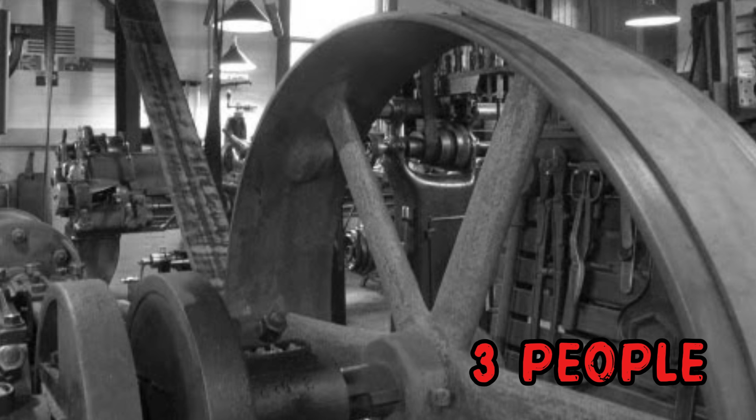breath. That wheel weighed somewhere between 64 and 68 tons, stood roughly 30 feet across, and through a network of shafts and belts it was, moments before it failed, the single source of motion for carding machines, looms, and hundreds of other machines running across 4 connected mill buildings.

It was not the first time this exact engine system had turned on the people who ran it. 3 years earlier, in 1888, it had already killed a man, an engineer named William Venable, and the mill had gone right on running it.

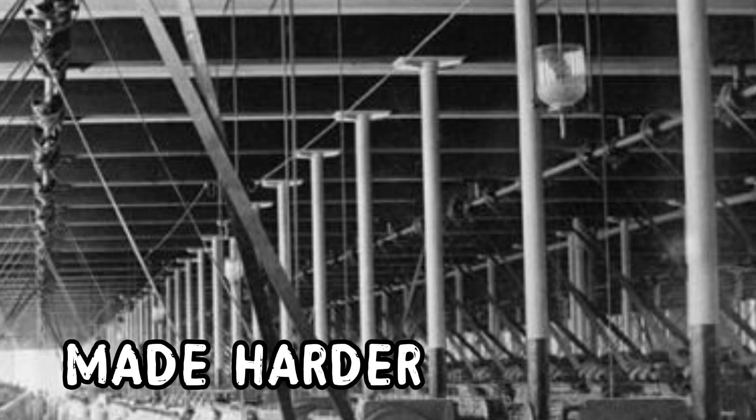The morning it finally came apart, the trouble was not showing up evenly across the complex, which made it harder for anyone on the floor to read in time. In the southern end of the mill, carding machines were losing speed for no reason the operators could point to, while at the very same time, in the northern end, the looms were speeding up, and at least one loom's own governor, the small mechanical safeguard built into the machine specifically to keep its speed under control, had already failed to hold it in check.

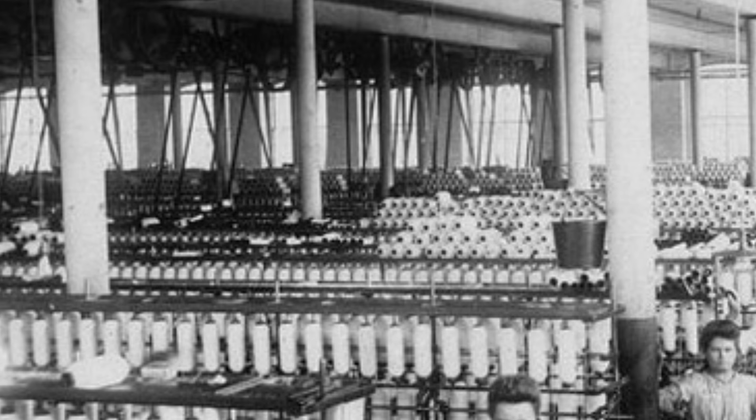To understand why an iron wheel spinning inside a New Hampshire textile mill could become one of the most concentrated stores of destructive energy in the entire building, you have to understand the problem it was built to solve in the first place, because the flywheel was never an accessory. It was the fix for a defect built into the steam engine itself, and the story of how that fix grew, decade after decade, into something powerful enough to level a mill floor is the story of an entire century of industrial power.

A piston steam engine does not produce power in a smooth, continuous push. Steam enters the cylinder, drives the piston down or across, and for that portion of the stroke, the engine is delivering real force to the crank. But between power strokes, and especially at the 2 points in the crank's rotation known as dead center, where the piston is at the very top or bottom of its travel and its thrust lines up directly with the crankshaft, the engine delivers essentially no rotational push at all.

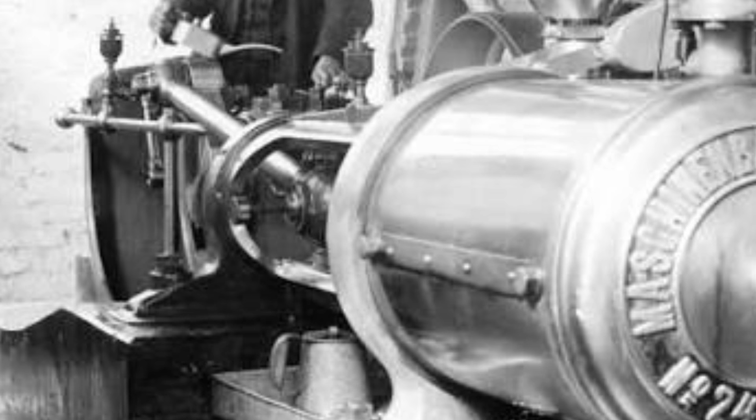Left to itself, a single-cylinder engine at dead center has nothing turning it forward. It can stall right there, mid-rotation, with a full head of steam behind a piston that is, for that instant, mechanically useless. Picture the crank arm of an engine like this, sweeping through a full circle.

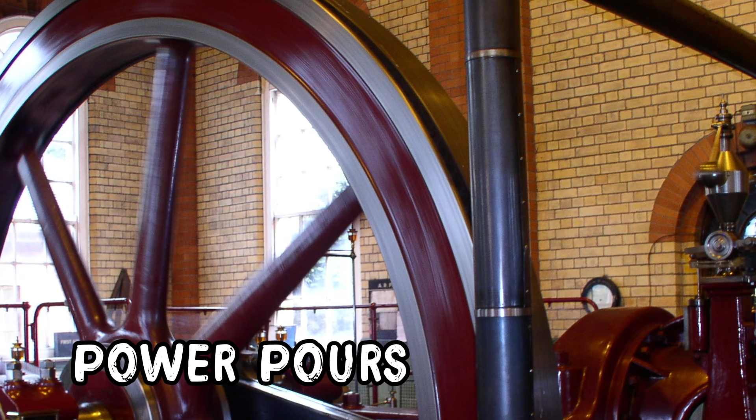For part of that circle, steam pressure behind the piston is shoving hard against the crank at an efficient angle, and power pours out. For another part of the same circle, the piston is still moving, but its push lines up almost uselessly with the shaft, contributing little. And at the 2 dead points, top and bottom, the push contributes nothing measurable at all. An engine running completely alone, with no reserve of motion carrying it through those dead points, delivers a rotation that surges, sags, and at the worst possible moment, under a sudden new load, can stop outright.

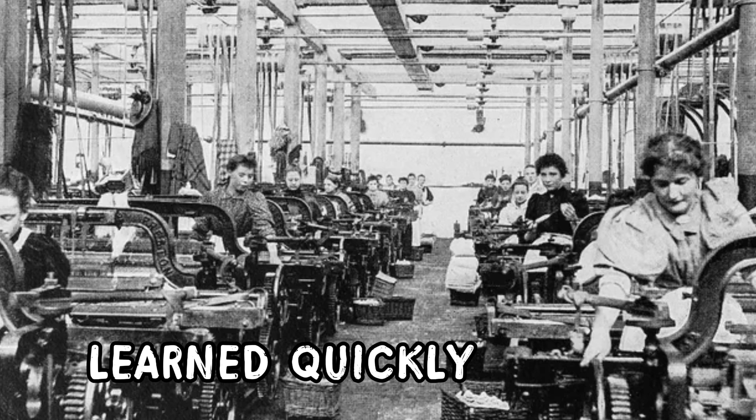Early millwrights and engineers who connected these engines directly to gearing, saws, looms, and line shafts learned quickly what that irregularity cost them. Power surged in and dropped away in a rhythm that matched the piston, not the needs of the machinery downstream. Gear teeth sheared off under the sudden peaks. Leather belts, already under constant tension, snapped at the jerks.

In a spinning mill, uneven rotational speed meant uneven twist in the yarn, thread that varied in strength and quality along its own length. In a press shop, it meant stamping force that came in hard on one blow and weak on the next. Saw blades chattered instead of cutting clean. And under any sudden load, an engine with no reserve of motion to draw on could stall, the entire line of machinery lurching to a stop with it.

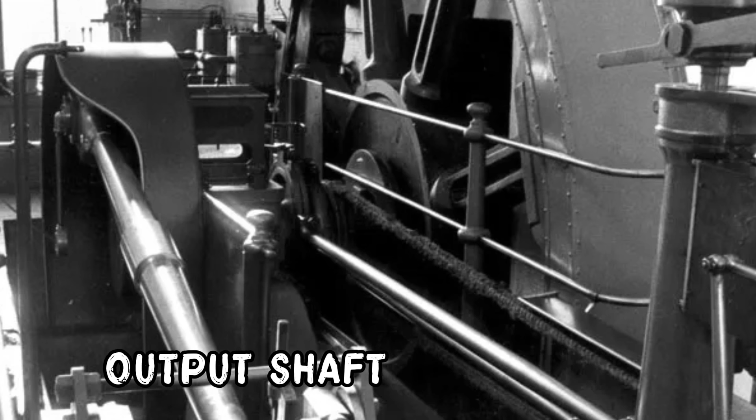The solution engineers arrived at was mechanically simple, even if its consequences were not. Mount a heavy wheel on the engine's output shaft, build most of its weight into a thick outer rim rather than a solid disc, and let that spinning mass do the job the piston alone could not.

During the power stroke, when the engine was delivering more force than the machinery needed at that instant, the surplus did not go to waste. It went into accelerating the wheel very slightly, stored as rotational motion in that heavy rim. Then, between strokes, as the piston's push fell away and even through dead center, the wheel's own momentum carried the crank forward, releasing that stored motion back into the system.

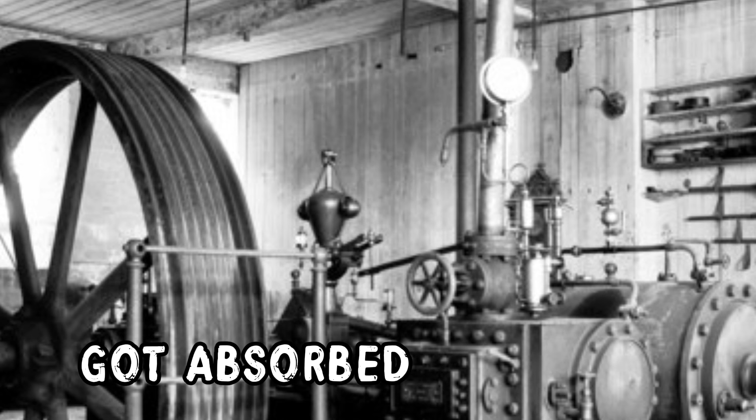The engine's own uneven breathing, in effect, got absorbed and smoothed out by a mass that was reluctant to change its speed quickly in either direction. What came out the other side, at the pulley, was not the jerky push of a piston, but something close to a steady, continuous rotation.

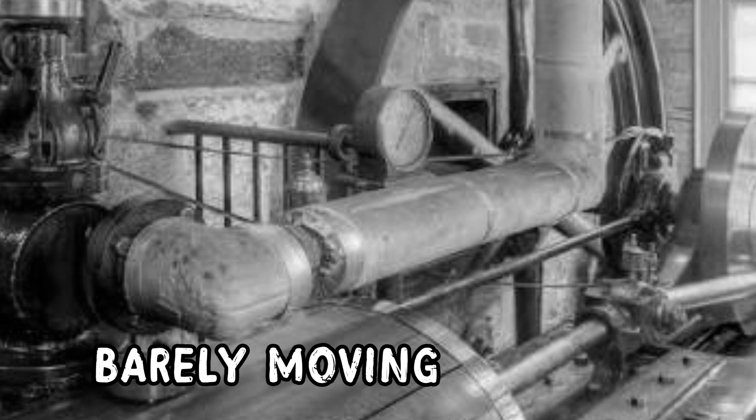A flywheel's usefulness is determined by where its weight sits, not by how much of it there is. A pound of iron sitting a few inches from the center of the wheel contributes almost nothing to its ability to store and release rotational energy because it is barely moving relative to the axis. That same pound of iron out at the rim, sweeping through a wide circle with every revolution, is doing the real work.

Engineers understood this early, which is why flywheel design trended, almost from the start, toward wide-diameter wheels with comparatively thin spokes and a heavy, thick rim, rather than toward solid iron discs of the same total weight. A lighter wheel with its mass concentrated at the edge could outperform a heavier, evenly distributed one simply because of where the iron was placed.

There was also a second, related lesson buried in the design of these wheels, one that took longer for the industry to fully absorb. A flywheel does not just smooth out a jerky engine, it also acts as a reservoir, a bank of stored motion an engine can draw on for a moment when a machine downstream suddenly demands more force than the piston alone is delivering at that instant.

A loom snagging, a press meeting a thicker piece of stock, a saw biting into a hard knot in the wood. Without that reservoir, a sudden spike in load could stall the whole engine. With it, the wheel gave up a slice of its stored motion, carried the system through the demand, and kept turning. The bigger and heavier the wheel, within reason, the deeper that reservoir, and the more forgiving the whole mechanical system became.

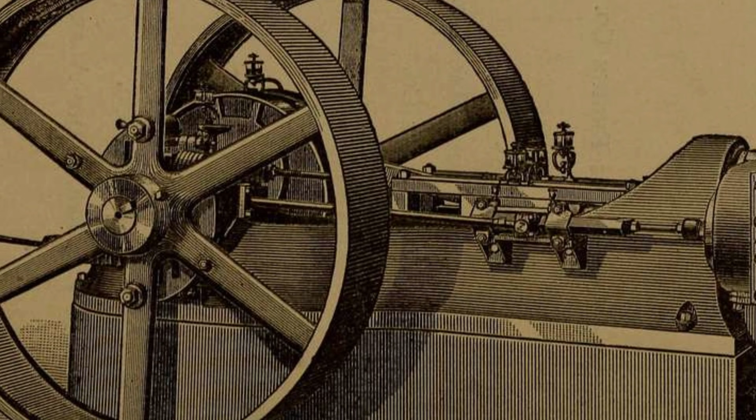And once that principle was understood, the obvious next question for any mill owner or engine builder was how much smoother, how much more powerful, how much more capable a system could become if the wheel got bigger. A larger flywheel could smooth out a bigger engine. A bigger engine could drive more shafting. More shafting could turn more machines.

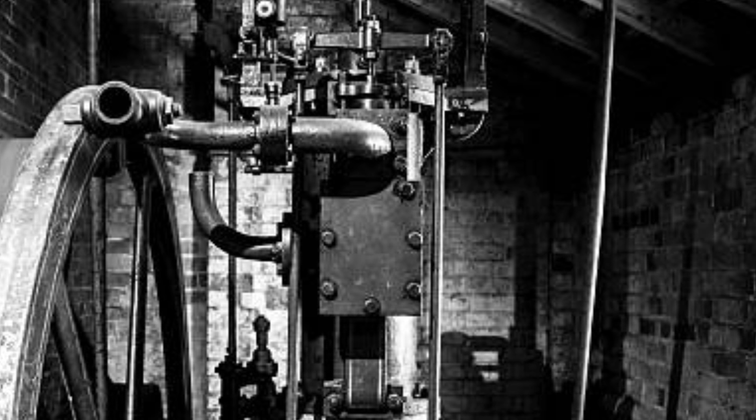Through most of the 19th century, the answer to almost every ambition in mechanized industry ran straight back through the size of the flywheel at the center of the plant. And it is that same upward trend, mill after mill, decade after decade, that eventually produced wheels large enough and fast enough at the rim to do exactly the kind of damage this history remembers.

That upward climb reached one of its most public and most celebrated moments in 1876 in Philadelphia at the Centennial Exposition marking 100 years of the United States. Inside Machinery Hall stood an engine built by George Corliss that was, by any measure available at the time, extraordinary. It stood over 45 feet tall.

Its cylinder bore was 44 inches across, with a piston stroke of 10 feet, dimensions that dwarfed anything most visitors had ever stood next to. Running at a modest-sounding 36 revolutions per minute, it produced roughly 1,400 horsepower. And at its heart sat a flywheel weighing 56 tons, 30 feet in diameter, with a rim 2 feet wide, spinning steadily at the center of the hall like the mechanical equivalent of a heartbeat for the entire exposition.

Visitors who walked into Machinery Hall were not looking at a single exhibit among many. They were looking at the source of motion for the entire building, a single wheel, and the engine turning it accounting for every belt, every shaft, every working machine on display, across acres of floor space. Nothing else in the hall moved unless that wheel was moving first.

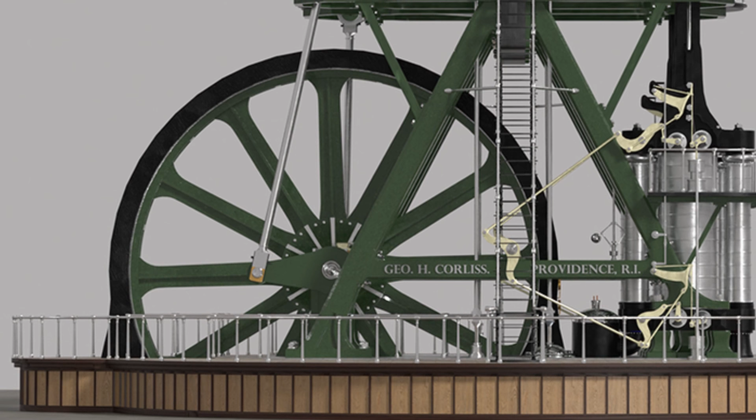That single engine, through more than a mile of connected shafting, powered 13 acres of machinery inside Machinery Hall, running lathes, looms, printing presses, pumps, and countless smaller exhibits simultaneously, all of it drawing its motion from one central source.

At the exposition's opening ceremony, President Ulysses S. Grant and Emperor Dom Pedro II of Brazil together started the great engine, and for 6 months it ran continuously, driving the largest concentrated demonstration of American industrial capability the public had ever witnessed in one room.

When the exposition closed, the engine was not scrapped or forgotten. It was shipped back to the Corliss Works in Providence, Rhode Island, and 4 years later it was sold to the Pullman Company in Chicago, where it went on running that factory until 1910, more than 3 decades of continuous service from a single central power source and its one great flywheel. The Corliss engine also represented a real technical advance in how steam itself was metered into the cylinder.

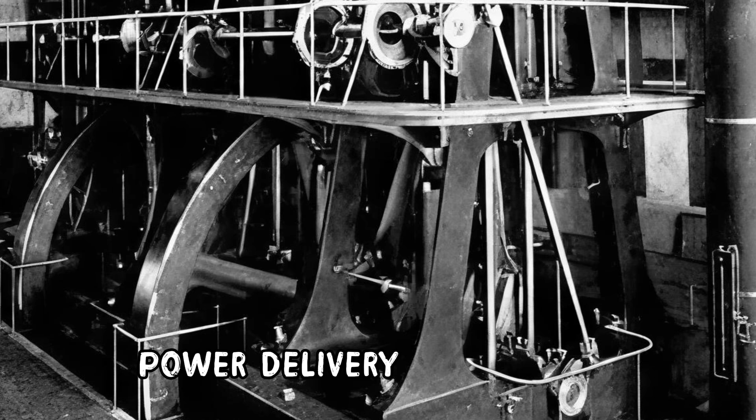Earlier engine designs admitted and cut off steam relatively crudely, which meant power delivery, even before you account for the piston's dead center problem, could be irregular from stroke to stroke. The Corliss valve system allowed far more precise control over exactly when steam entered the cylinder and when it was cut off, which meant the power arriving at the crank in the first place was steadier and more predictable.

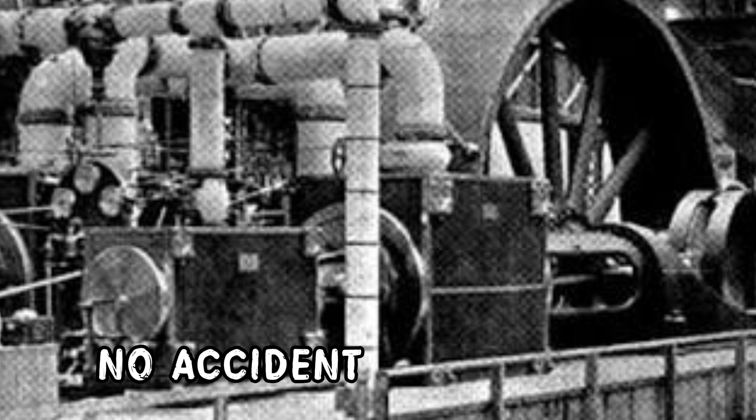Pair that improved valve control with a large, well-built flywheel, and you had, for its era, about as smooth and dependable a source of rotational power as industrial technology could offer. It is no accident that Corliss engines and large flywheels became a standard pairing across American industry in the decades that followed, including at the very mill complex in Manchester, where this story will return.

This central power model, one engine, one flywheel, one network of line shafts, pulleys, and belts reaching through multiple floors and sometimes multiple buildings, became the standard architecture of industrial power for most of the 19th century and well into the 20th. Nowhere is the scale of that dependence clearer than at the Queen Street Mill in Burnley, England, where a single 500-horsepower coal-fired stationary steam engine, through its shafting, drove 600 separate Lancashire power looms at once.

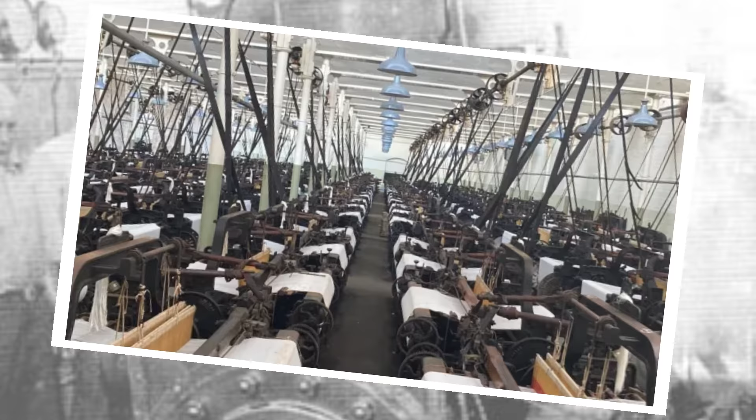One engine, one flywheel, absorbing and releasing the pulses of that engine's power strokes. 600 machines, each entirely dependent on the health of that one central system. It was, in the plainest sense, one heart supplying motion to hundreds of limbs, and everything admirable about this system, and everything dangerous about it, comes from the very same design choice. Put all the power, and eventually a staggering amount of stored energy, into one central spinning mass.

The instinct that made these wheels so effective, bigger diameter, heavier rims, higher rotational speed, was also, without most 19th century engineers fully appreciating how sharply the numbers moved, the same instinct that made them progressively more dangerous. The energy a flywheel holds does not track its weight or its speed in a straight line. It depends on how that weight is distributed relative to the center, which is why rim mass mattered so much more than mass near the hub, and it depends on the square of the wheel's rotational speed, which is a detail that changes everything about how these machines behaved.

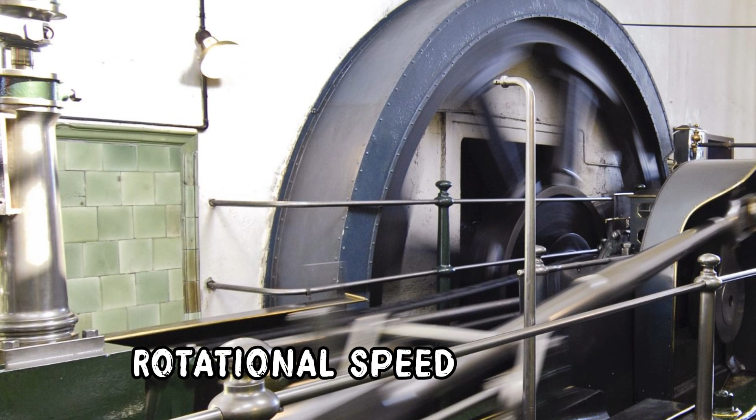Take that second part first, because it is the one that quietly governed nearly every flywheel disaster in this era. Double a flywheel's rotational speed, and you do not simply double the energy locked up inside it. You quadruple it. A wheel spinning only a little faster than its designers intended is not carrying a little more stored energy than expected, it can be carrying dramatically more, energy that has to go somewhere the instant the iron holding it together gives way.

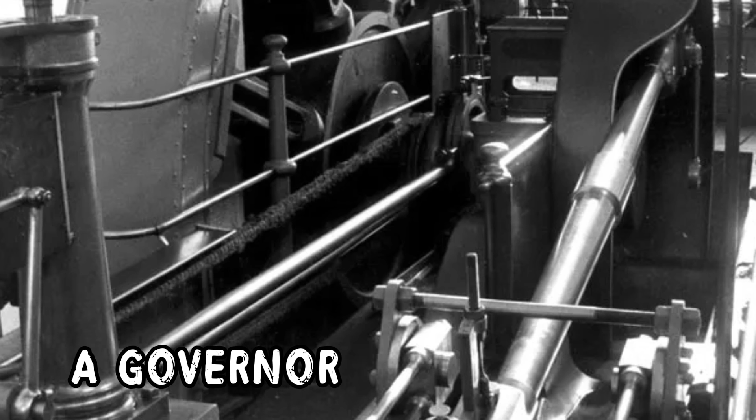This is precisely why governors, the mechanical devices meant to hold an engine's speed steady under changing load, mattered so enormously to safety and not just to product quality. A governor that failed, or a load condition that let an engine run away even briefly, did not create a proportionally small safety problem. It created a compounding one. A 10% overspeed sounds, to an untrained ear, like a minor mechanical hiccup, the kind of thing a mill engineer might note and correct without much concern.

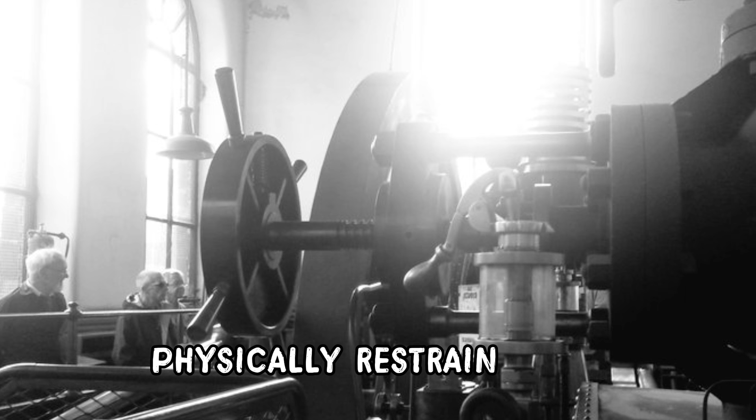Run the numbers on stored energy, and that same 10% translates into an increase of roughly 21% in the energy the wheel is carrying. Energy the rim, the spokes, and the hub all have to physically restrain through nothing more than the tensile strength of the cast iron itself. Push the overspeed higher, and the energy climbs faster still, curving upward far more steeply than the speed number itself suggests. A wheel does not have to run away wildly to become dramatically more dangerous. It only has to run away a little, for long enough, while nobody manages to bring it back under control in time.

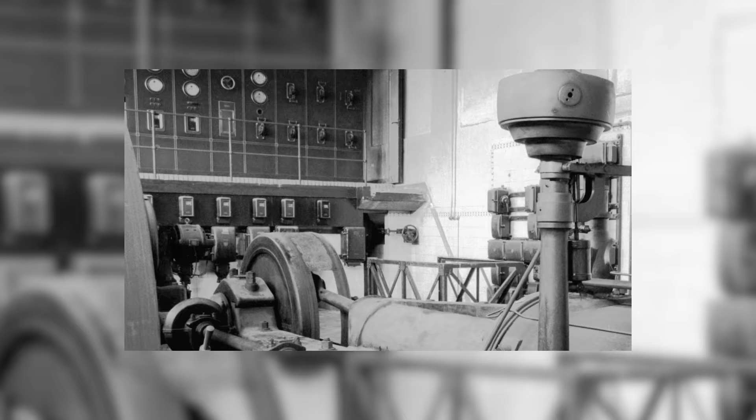The other half of the equation, where the mass sits, explains why engineers pushed flywheel design toward wide, heavy-rimmed wheels in the first place. Iron sitting close to the axle, spinning in a tight little circle, contributes almost nothing to the wheel's stored energy, no matter how much of it you pile on there. Iron out at the rim of a 30-foot wheel is moving through an enormous circle with every single revolution, and that motion is where nearly all of the wheel's usable, storable energy lives.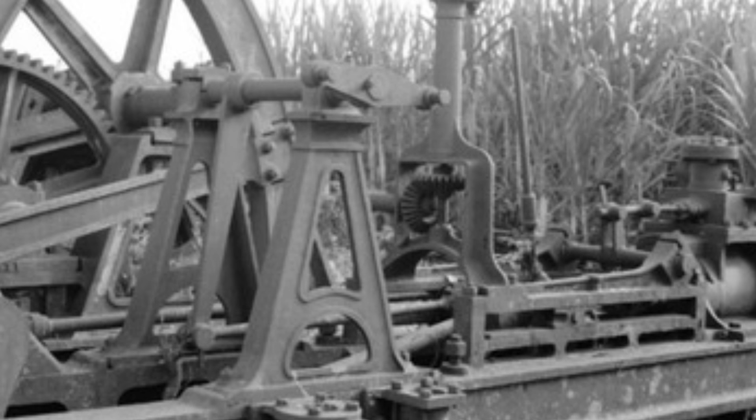But cast iron carries a serious limitation that has nothing to do with how carefully it is used and everything to do with what it is. It is brittle. It tolerates very little tension before it fails, and it has almost no tolerance at all for internal flaws, the kind of hidden porosity, trapped gas pockets, and cooling stress cracks that can form invisibly inside a large casting as the molten iron cools unevenly from the outside in.

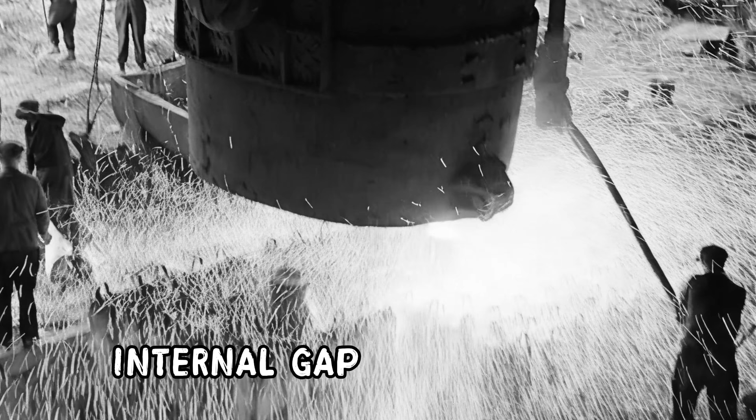Foundry workers pouring a casting this large were, in effect, fighting the physics of cooling metal itself. Molten iron poured into a mold this size does not cool evenly. The outer surface against the mold hardens first, while the interior remains molten longer, and as that interior finally cools and contracts, it can pull away from the already solid metal around it, leaving behind exactly the kind of internal gap or crack that no amount of skill at the pour could reliably prevent.

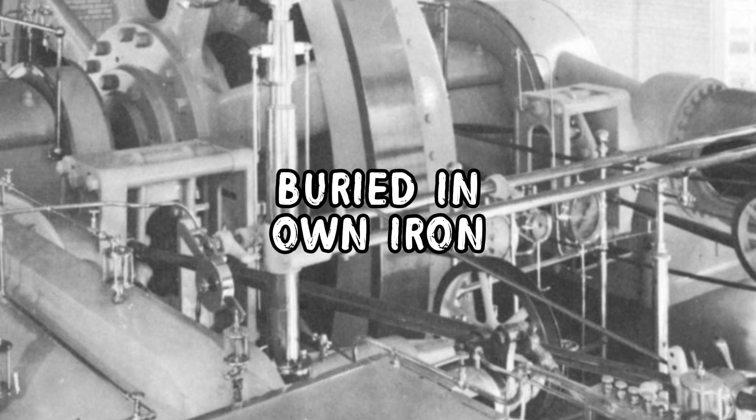This was a property of casting iron in large masses at all, not a matter of careless foundry work, one that the industry understood in general terms without ever developing a dependable way to inspect for it after the fact. A flywheel rim cast with one of these hidden flaws could look completely sound. It could pass every visual inspection anyone in the 1800s knew how to perform. It could run for months or years without incident. And it could still be carrying, buried in its own iron, a weak point sitting exactly where stress concentrated most once the wheel reached high rim speed.

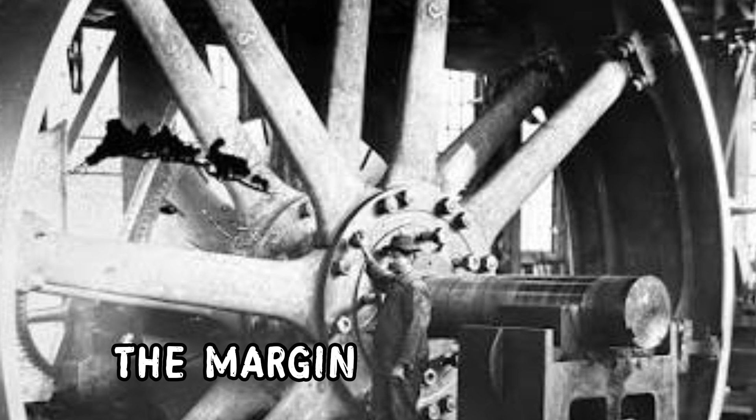A flaw nobody on the factory floor had any reliable way to detect, because there was no practical means at the time to see inside a solid iron rim and confirm it was sound all the way through. Engineers of the period set their safety margins based on the known tensile strength of good cast iron, and they generally believed those margins were conservative. Reality kept proving them wrong, because the margin only holds if the iron in front of you matches the iron in the textbook. And a hidden casting flaw meant it sometimes did not, and the wheel could fail at speeds well below what its designers had calculated as safe.

Put all three pieces together, and you can see exactly how a machine engineered specifically to smooth out danger and irregularity in a factory became, at sufficient scale, a source of danger all its own. More rim mass meant more stored energy and smoother running, and also more energy waiting to be released if something gave way. Higher rim speed meant smoother, more powerful central drive, and also, because energy scales with the square of that speed, a rapidly compounding amount of stored force behind even a modest overspeed.

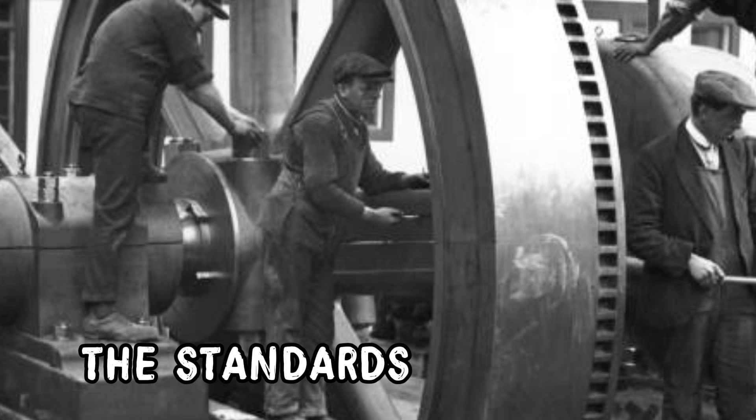And cast iron made all of it affordable and buildable at the scale 19th century industry demanded, while quietly guaranteeing that some fraction of these wheels, built exactly according to the standards of the day, were spinning at high speed with a flaw already sitting inside them that no one could see and no one could fully guard against.

A flywheel running normally at its intended speed in sound iron was one of the safest and most valuable pieces of machinery in any mill. The same wheel, running even modestly too fast or cast with a defect no inspection could catch, was something else entirely, and the people working closest to it had almost no way to know, from the outside, which kind of wheel they were standing next to on any given morning. They were standing very close to it as a matter of routine.

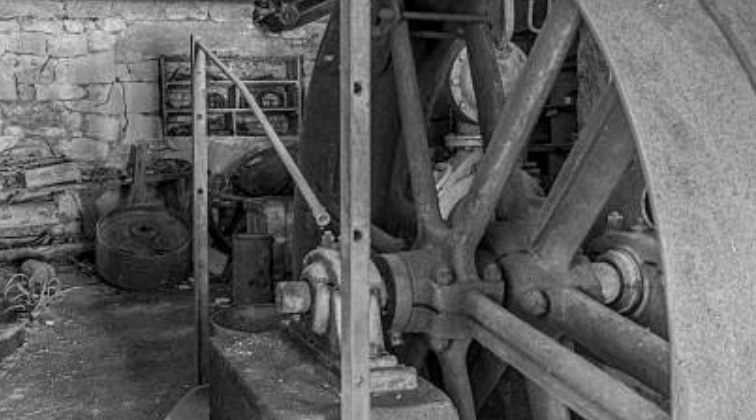The mills built around this central power architecture were loud, crowded, and full of rotating machinery that ran largely unguarded by the standards of any later era. Overhead line shafts turned continuously at head height and above, spinning pulleys studded the walls and ceilings throughout the building, and leather belts, some of them running at considerable speed, crossed walkways and work floors as a normal feature of the environment rather than an exception to it.

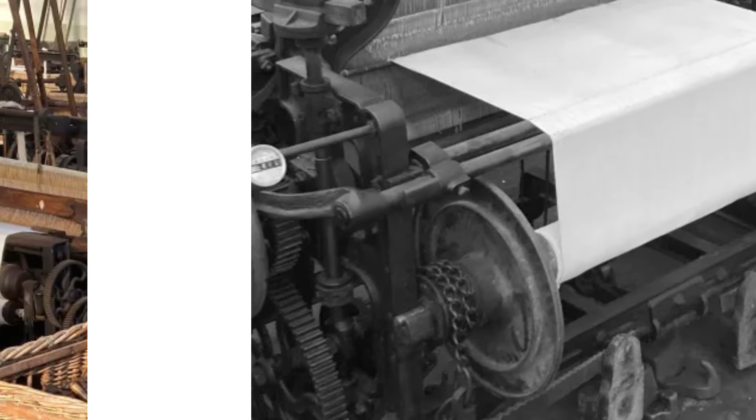Workers, sometimes very young workers, spent their entire shifts in close physical proximity to exposed rotating shafts, pulleys, and belts because there was, structurally, no way to build this kind of factory without them. Every machine on the floor depended on a mechanical connection reaching back eventually to the one central engine and its flywheel, and that connection had to travel through the same space the workers occupied.

Injuries from becoming caught in unguarded shafting, pulleys, and belts, a hand or a sleeve or loose hair drawn into moving machinery, were a well-documented and recurring hazard of this entire industrial system across American and British mills in this era, not an isolated failure at any one plant.

It was a known cost of working inside a building where power moved everywhere at once, through exposed iron and leather. Workers learned the geography of danger in their own mill the way people learn a familiar street, which shaft ran close overhead on which walkway, which belt whipped past at ankle height near a particular machine, which pulley was better given a wide berth than a close one, because the building itself never stopped moving around them for the length of a working day.

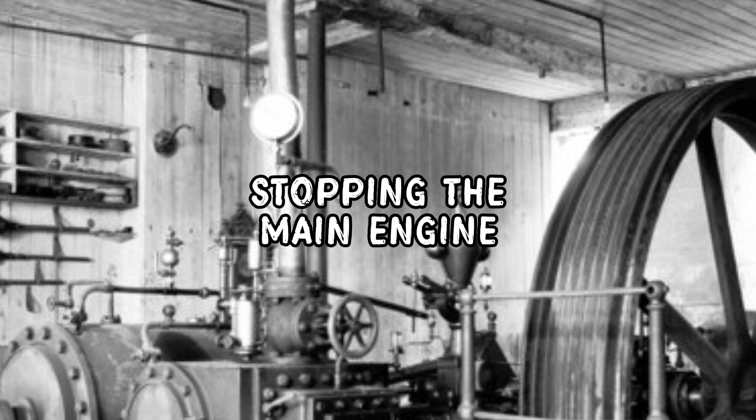And because the whole system was interconnected, running from one central source out to every machine on the floor, maintenance often could not wait for a convenient, fully powered down moment. Stopping the main engine meant stopping every single machine fed by its shafting. An entire mill's production halted at once, not one idle machine but the whole building idle simultaneously.

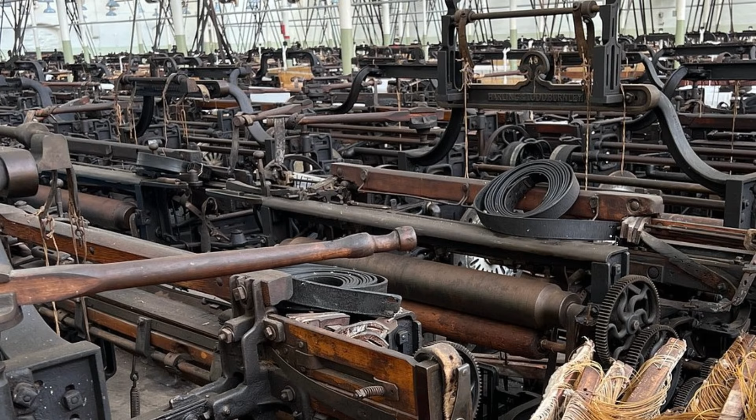That made a full shutdown for inspection or repair an expensive decision, one owners were reluctant to make more often than strictly necessary, which meant repairs and adjustments were frequently carried out with the system still running or only partially stopped, workers moving among live shafts and belts to do the job rather than waiting for silence that came at a real production cost every time it was called for.

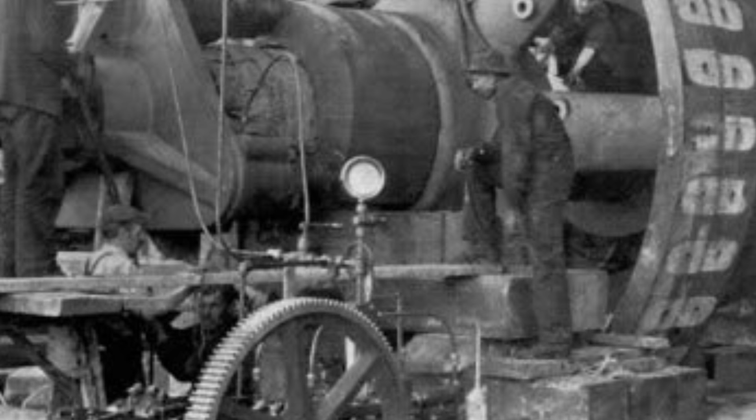And even when a genuine emergency did call for the system to stop immediately, it could not in an instant. A flywheel carrying tens of tons of iron at speed does not surrender its momentum the moment steam is cut off. It takes real time, real distance of continued rotation to spin down, because the same stored energy that made it useful for smoothing power delivery made it equally resistant to stopping on demand. Shutting off the engine slowed the system down. It did not freeze it.

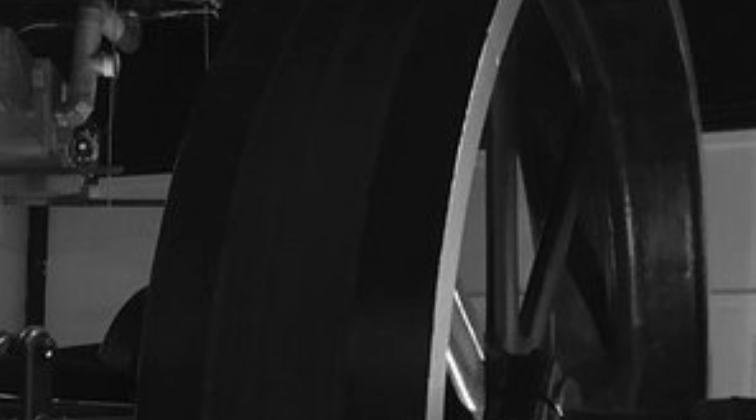In the earliest moments of any sudden failure, whatever was already in motion stayed in motion. Belts still running, shafts still turning, the great wheel still carrying its own momentum forward, whether or not anyone wanted it to. All of that, the crowded proximity of workers to exposed drive machinery, the economic pressure against stopping the system, and the simple physical fact that a machine this massive cannot be made to stop instantly, converged inside Mill Number 7 at Amoskeag on the morning of October 15, 1891.

The Amoskeag Manufacturing Company was, by that point, one of the largest textile operations in the country, a sprawling complex of connected mill buildings strung along the Merrimack River in Manchester, New Hampshire, employing thousands of workers across its various departments, all of it strung together and powered from a shared central plant.

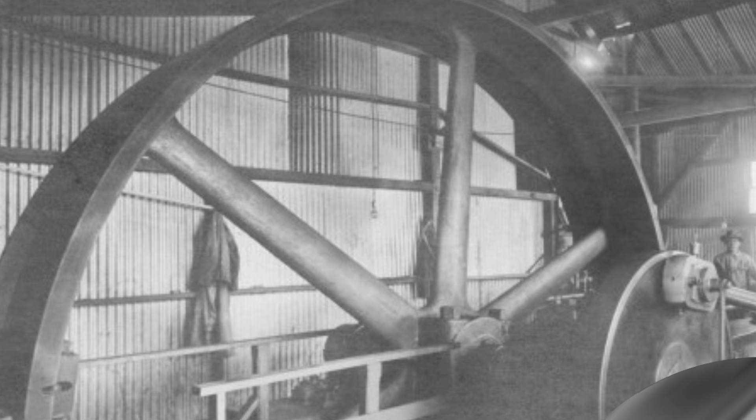A pair of large Corliss engines, each with 36-inch cylinders, generated roughly 2,000 horsepower combined, all of it gathered and smoothed by a flywheel reported at somewhere between 64 and 68 tons. Sources from the period differ slightly on the exact figure. It was distributed outward through multiple belts, including that main belt 42 inches wide, to mills number 4, 5, 7, and 8. It was, in essence, a Queen Street mill on a larger and more consequential scale, one engine system, one enormous flywheel, an entire industrial complex leaning on its steady rotation.

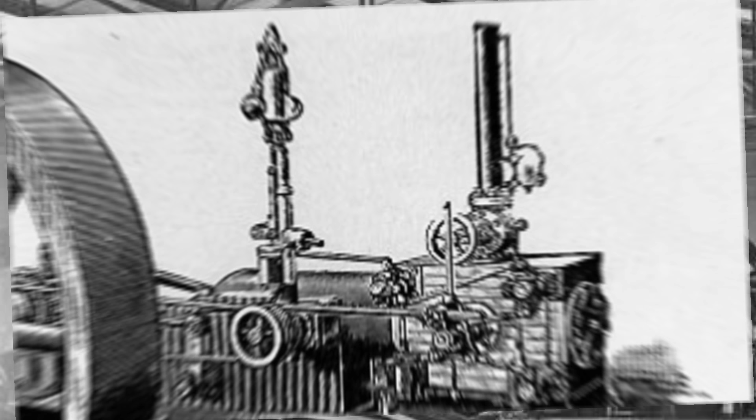This was not an untested system running for the first time. 3 years before, in 1888, the same engine system had already failed once with fatal consequences, killing an engineer named William Venable. The details of that earlier incident are thin in the historical record, but the fact of it is not. This was a machine that had already taken a life before that morning in October 1891, and it had gone back into daily service afterward, because stopping it permanently meant stopping the mill.

On the morning of October 15, something in the power delivery through the complex began to go wrong. Belts started overheating, without an obvious cause visible to the people on the floor. Sparks began flying from the wide main belt. The great flywheel was climbing in speed, turning faster than it was meant to run, and the effects of that instability were not uniform across the mill, which made the problem harder to read in the moment rather than easier.

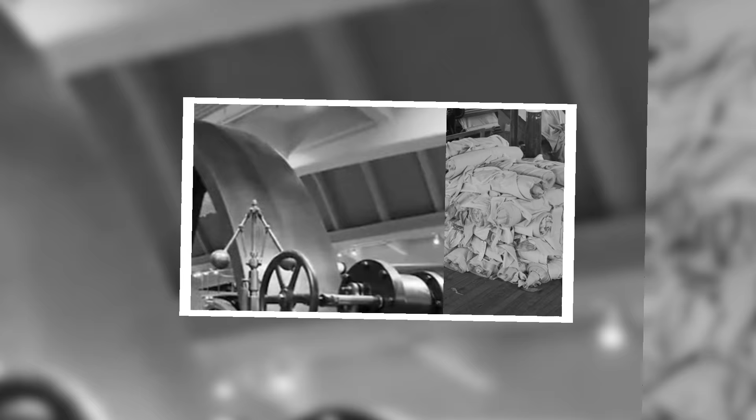In the southern end of the complex, carding machines were slowing down. In the northern end, at the very same time, looms were speeding up, dangerously so, and at least one loom's own governing mechanism, the local safeguard meant to keep its speed under control, failed to hold it in check. 10 years is long enough to know a machine's ordinary moods, the sounds and vibrations that mean nothing, and the ones that mean something is beginning to go wrong. Samuel J.

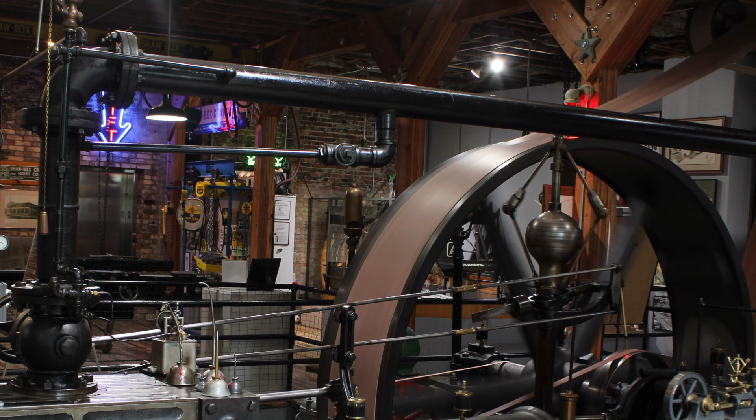Bunker, the mill's engineer, a man with that decade of experience in the position and well regarded by those who worked with him, went down into the power pit to investigate the trouble directly, at the source, among the shafting and the engines themselves, doing exactly what an engineer with his experience was supposed to do when the machinery under his care started behaving in a way he could not explain from the floor above.

An assistant engineer, recognizing the danger in the flywheel's climbing speed, attempted to cut power to the system. It was, by every account, the correct response to a wheel that was overspeeding. It was also, given how much momentum tens of tons of iron carry even after steam is shut off, a response that could not arrest what was already happening fast enough. Moments later, the flywheel let go.

It tore itself apart under the load its own excessive speed had put on it, and the stored rotational energy inside that iron, energy that had been quietly accumulating with every increment of overspeed, tore loose all at once, in less time than it takes to complete a single word. Fragments of the wheel, pieces of iron weighing enormous amounts individually, ripped free at whatever speed the rim had reached in its final moments and were hurled roughly 200 feet from the point of failure, crossing that distance in a fraction of a second. The second floor of mill number 7 caved in under the force.

Metal fragments punched through the roofs and windows of neighboring buildings. Timbers came down with the floor. Steam screamed out of ruptured lines running through the pit and the floors above it. None of it was the work of an explosion in the ordinary sense, no combustion, no chemical blast. It was decades of accumulated rotational energy, the same kind of energy that had spent years quietly smoothing the mill's power delivery, finding an exit all at once through a crack in the metal that had been waiting, unseen, since the day the wheel was cast.

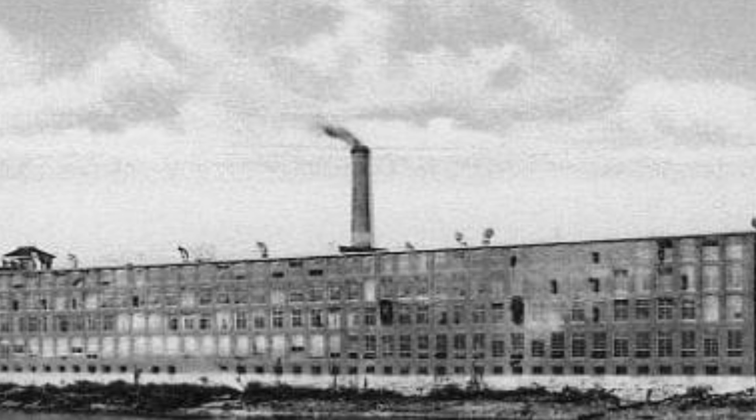3 people were killed. Samuel J. Bunker died instantly, down in the power pit where he had gone to investigate the very trouble that then killed him. Ada, also recorded in some accounts as Ida Cram, died later at Elliott Hospital of a head injury sustained in the collapse. Mary Kane, 21 years old, died of a fatal injury to her scalp and head.

At least 8 other workers suffered broken bones and serious injuries in the same event, and among the injured was a boy of 12, a reminder that the mill's workforce, like so many of its era, included children working alongside adults inside a building where an iron wheel weighing tens of tons had just come apart.

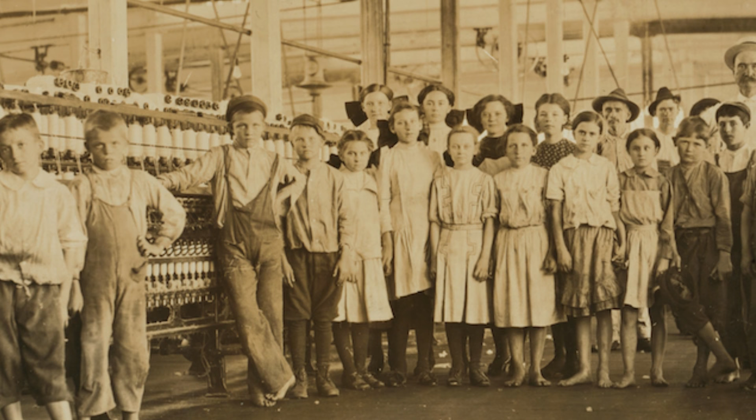A coroner's jury investigated the disaster afterward, and engineers examined what remained of the wreckage. What they found inside the broken iron were irregularities left over from the original casting process, gaps and flaws baked into the metal from the moment it was poured. Decades of quiet weakness, sitting inside a wheel that had, by every visible external measure, looked sound. The investigators could not reach a fully conclusive account of exactly how the failure sequence began.

Their best assessment, offered as the most probable explanation rather than a proven certainty, was that a gradual failure somewhere in the belt connecting mechanism had likely produced the erratic, cyclical power fluctuations reported that morning, the uneven slowing in the south end and speeding in the north, and that those fluctuations had progressively overloaded the flywheel until it exceeded a safe rotational speed and, meeting the hidden weakness already inside its own casting, burst. No blame was assigned to Bunker, and none was assigned to the company by the coroner's jury that reviewed the evidence.

Amoskeag was not an isolated case, even if it remains one of the most fully documented. Flywheel bursts of this kind were a recognized, recurring hazard across American and British industry through this period. The same underlying pattern of high rim speed, brittle cast iron, and undetectable internal flaws played out at other plants as well, including a documented flywheel accident at the Providence Rubber Shoe Company in Providence, Rhode Island. The specifics differed from incident to incident, but the shape of the danger did not. A central wheel, essential to production, trusted for years, failing suddenly and without meaningful warning once its speed or its metal crossed a threshold nobody could see coming from the outside.

And still, mills kept running these systems, for reasons that had nothing to do with indifference and everything to do with what the alternative cost. For most of the 19th century, central steam power, one large engine, one great flywheel, a mill-wide network of shafting reaching every machine, was the best industrial technology available. Nothing else could deliver that volume of continuous mechanical power to hundreds of machines at once. Taking a central flywheel fully out of service for the kind of thorough interior inspection that might have caught a casting flaw meant stopping every machine in the mill that depended on it.

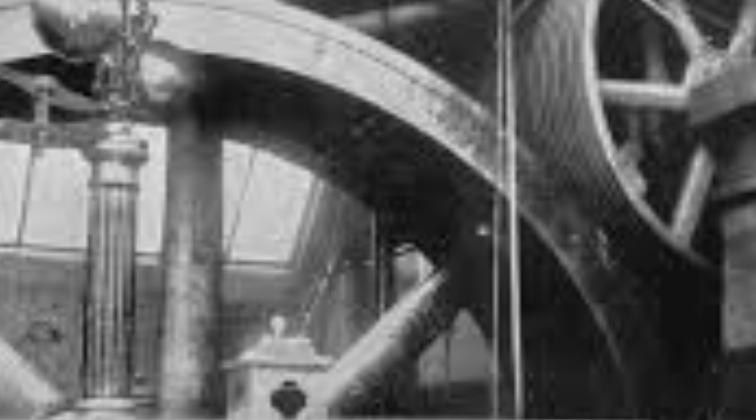A production halt across the entire complex rather than a single idle station, and mills absorbed that cost only when they had to, not as routine preventive practice. That inspection would have cost a mill the size of Amoskeag dearly.

Pulling the flywheel out of service was not a matter of shutting down one loom while the others kept working. It meant every carding machine, every loom, every piece of equipment fed by that shaft network across those 4 mill buildings went silent at once, for as long as the inspection and any necessary repair took, with no product coming off any of those machines and no way to shift the work elsewhere, because there was no elsewhere. The whole complex ran off the same wheel.

Weighed against that kind of complete, multi-building stoppage, the temptation to keep a known engine running, watching it, adjusting it, trusting the margins its builders had calculated, rather than pulling it apart to search for a flaw nobody could even guarantee was there, reflected the economics of the system more than any disregard for the danger. Caution and continued operation looked, from week to week, like the same reasonable choice, right up until the week it was not.

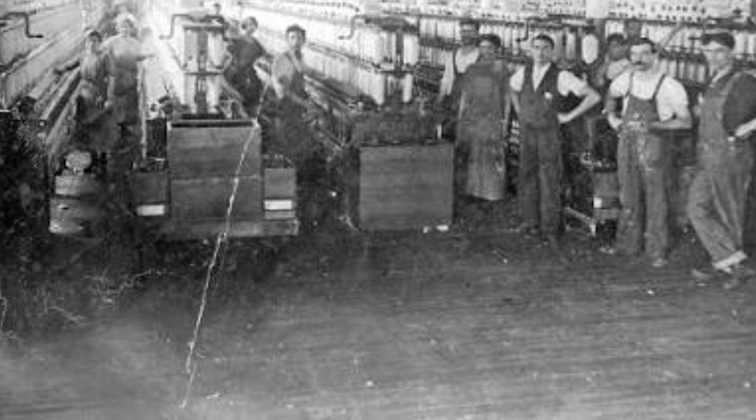Replacing or fully rebuilding a central power system entirely was slower and more expensive still, which meant an engine and flywheel already known to carry some risk, sometimes a documented risk with a name and a date attached to it, as at Amoskeag in 1888, often kept running rather than being pulled from service, because the statistical odds of failure on any given day were low, even while the consequence, when it did happen, was severe.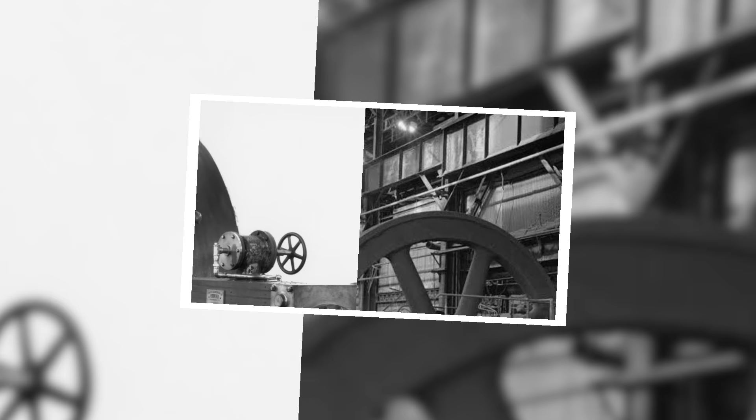That calculation did not go unchallenged after events like Amoskeag repeated themselves across the industry. Engineering practice shifted in the decades that followed, not through any single dramatic reform, but through a steady accumulation of more conservative standards. Steel and improved iron alloys, materials with far more tolerance for internal stress and far less brittleness than plain cast iron, gradually displaced cast iron for the most heavily loaded flywheel rims. Rim speed limits and safety margins were set more conservatively, with less confidence placed in the older assumption that theoretical tensile strength alone was a sufficient guarantee.

Governors improved, giving engines tighter control over rotational speed and reducing the chances of the kind of overspeed event that had preceded the Amoskeag failure. Inspection practices improved as well, even without a perfect way to see inside solid iron.

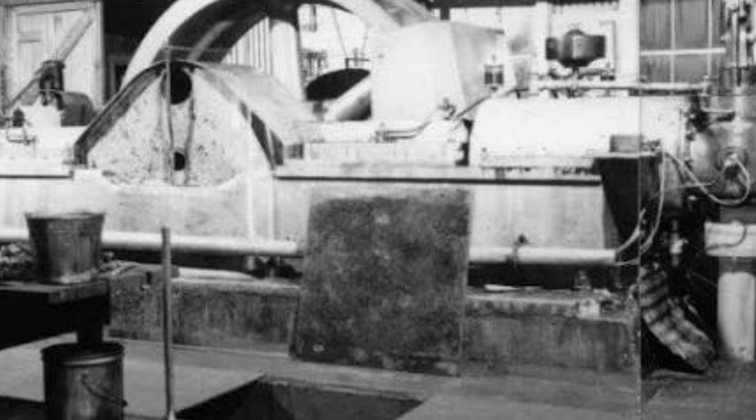And physical containment measures, recessed power pits built to direct and absorb debris rather than let it travel freely, additional guarding around exposed machinery, became more common, an acknowledgement that even a well-built, well-maintained flywheel could not be guaranteed never to fail, only made less likely to, and its failure, if it came, at least partially contained rather than left to travel 200 feet through open mill floors.

None of that engineering caution, however, was what finally ended the era of the giant central flywheel. What ended it was a better system arriving to replace it. Electric motors changed the fundamental architecture of factory power, though not overnight and not by simple substitution. In their earliest years, only large electric motors were practical to build and install, so the first electrified factories still used one large motor to drive the same kind of central line shafting the steam engines had always driven. The wiring and the power source changed, but the belts, the pulleys, and the single point of mechanical failure largely stayed the same.

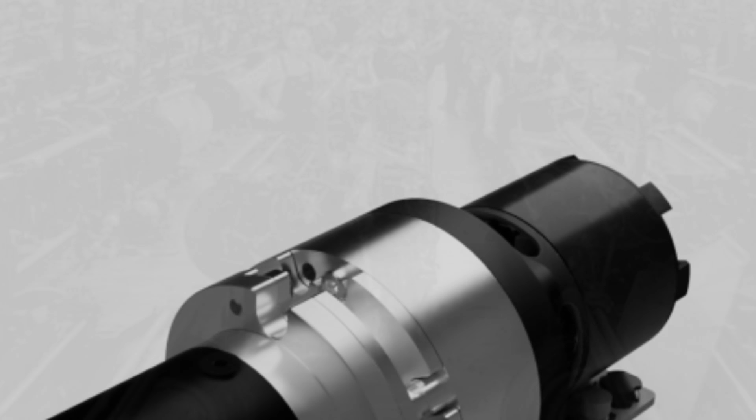It was only after roughly 1900, as smaller and cheaper individual electric motors became practical, that factory design began to change in a more fundamental way. New installations increasingly abandoned the single central engine entirely, in favor of what came to be called unit drive, a small motor mounted at or near each individual machine, rather than one great engine and flywheel feeding power outward through a mill-wide web of shafts and belts.

Where a single overhead shaft had once reached across an entire floor, carrying its constant risk to everyone working beneath it, unit drive replaced that shaft with nothing more than a wire, and the difference showed up immediately in how the factory floor itself could be organized and how it felt to work on it. Unit drive replaced the old central wheel not because regulators or reformers banned it, but because on nearly every practical measure that mattered to a factory owner, it was the better system.

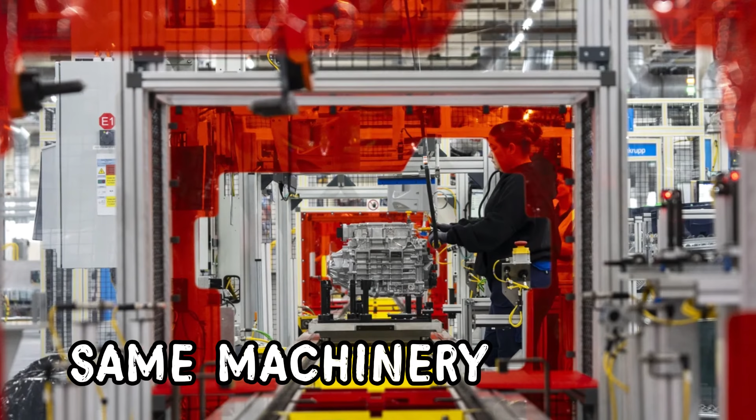Firms that made the switch from shaft and belt power to individual electric drive documented meaningfully less worker sick time and real increases in production, using the very same machinery they had always run, machinery that now moved when its own motor turned it, not when a shaft somewhere else in the building happened to be turning. Machines could finally be arranged on the floor according to the logic of the workflow itself, rather than being chained to wherever a length of shafting happened to reach.

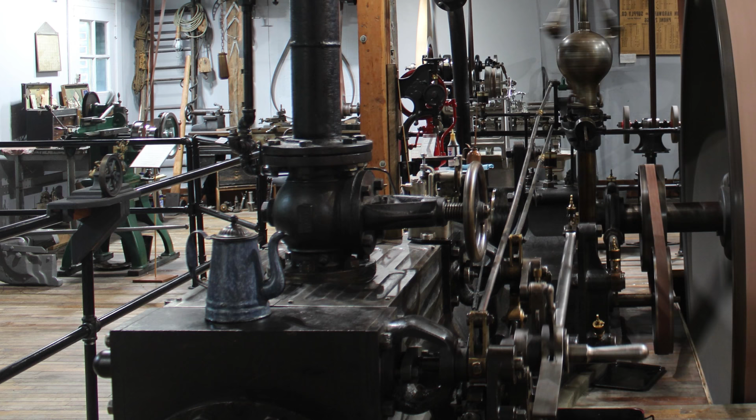A single machine could be started or stopped instantly, on its own, without shutting down production anywhere else in the building. And with that change, the specific failure mode that had killed 3 people at Amoskeag, one central mass of spinning iron, tens of tons of it, carrying enough stored energy to tear through walls and floors if it ever let go, disappeared from the ordinary factory floor.

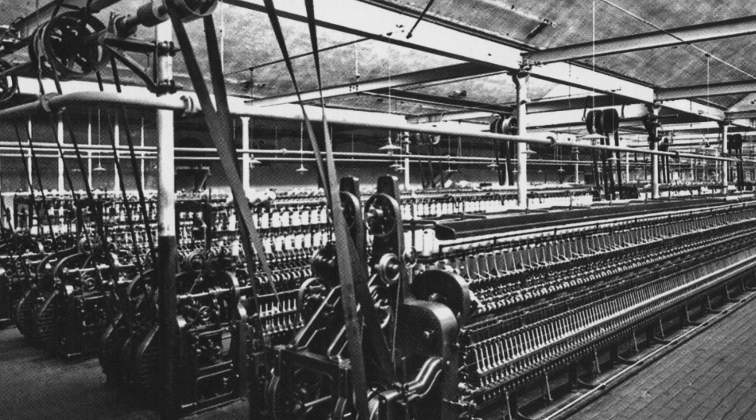By the middle of the 20th century, most line shaft systems had gone out of service entirely, and very few examples survive intact today. But the principle that made the great mill flywheels valuable in the first place, a spinning mass storing surplus energy and releasing it back when it is needed, never went away. It only left the factory floor, and it moved into settings engineered far more carefully around exactly the danger that Amoskeag exposed.

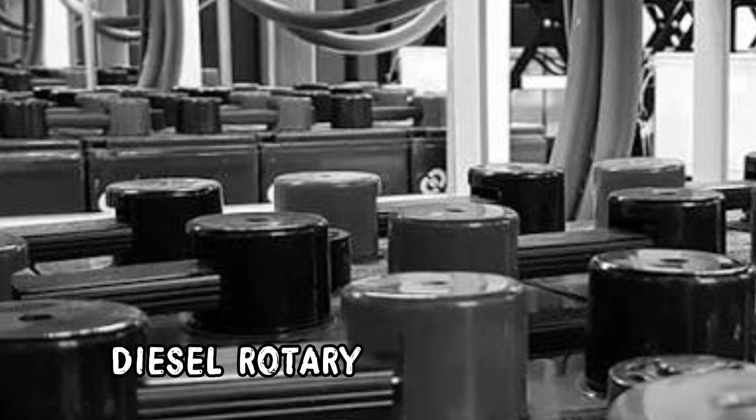Flywheel energy storage exists today in grid-scale installations, holding short-term reserves of energy and helping stabilize the frequency of electrical grids that, much like a 19th-century line shaft, need their power delivery kept smooth and steady rather than jerky and uneven. It exists in uninterruptible power supply systems, including diesel rotary installations, where a spinning flywheel bridges the brief gap between a power failure and the moment backup generation comes fully online, doing, in miniature and under careful control, exactly what the wheel at the center of the Amoskeag mill was doing on a much larger and far less controlled scale, carrying a system through the gap where power would otherwise falter.

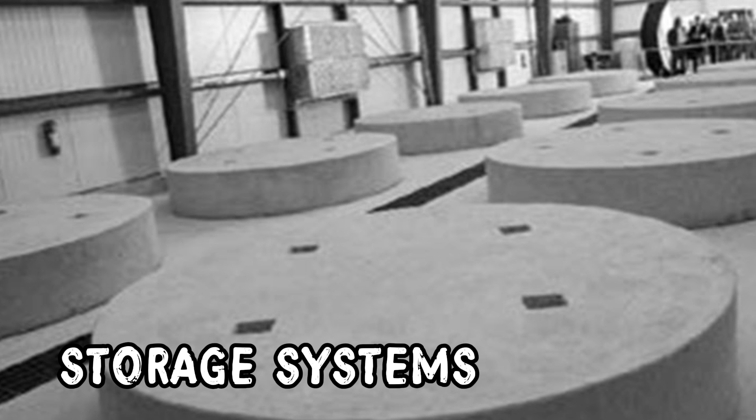The scale, of course, is nothing close to what stood in the power pit at Amoskeag or under Machinery Hall in Philadelphia. Modern flywheel storage systems are built for measured, contained bursts and steady regulation, not for driving a mile of shafting across 13 acres of machines. But the underlying bargain is identical to the one 19th-century engineers were making without fully realizing how exposed it left them. Accept the risk of holding a large amount of rotational energy in one place in exchange for the ability to release it smoothly and precisely when a system needs it most.

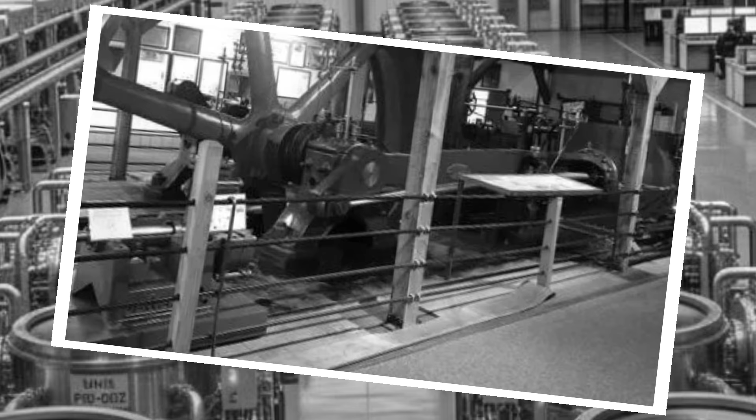What separates a modern installation from Amoskeag's mill is not the physics, which has not changed at all, but the engineering discipline wrapped around it, the acknowledgement, built into the design from the start, that stored energy on this scale must always be assumed capable of getting out. What has changed is the material and the containment, the two factors that turned Amoskeag's wheel from a solved engineering problem into a fatal one.

Modern flywheels are commonly built from carbon fiber composites rather than brittle cast iron, materials engineered specifically to fail differently even if they do fail, and they are typically enclosed in sealed containment housings, built on the explicit assumption that a failure is always possible and must be planned for, not simply hoped against. If a modern flywheel does come apart, it is designed to break into small, contained fragments inside its housing, rather than releasing an intact multi-ton mass of iron outward at highway speed into open space the way the Amoskeag wheel did in 1891.

There is no single careless villain in this account. There was an engineering standard that trusted a margin calculated from good iron, a manufacturing process that could hide a flaw inside good iron without ever showing it on the surface, and a business model that made a full teardown of an already suspect system, one that had already killed once in 1888, a cost mills kept choosing to defer rather than absorb, right up until the deferral ran out.

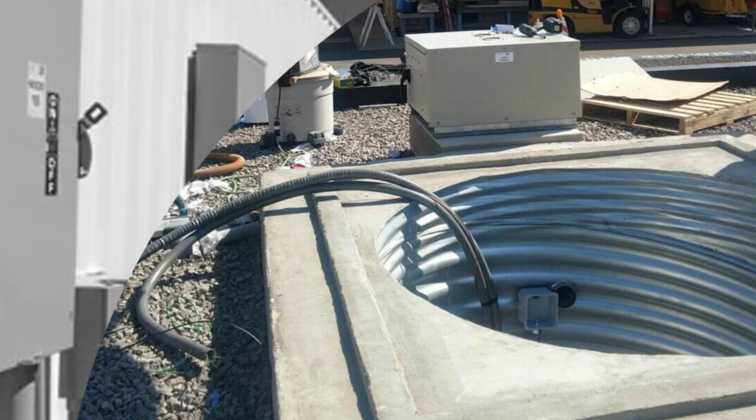The wheel that came apart in Manchester was never a flaw in the idea of the flywheel itself. It was the same idea, the same physics, the same storage of rotational energy that smoothed the jerk of a piston engine and let one machine drive hundreds of others, pushed to a scale and a speed that the cast iron of its day could not always be trusted to hold, and built without any way to see the crack already waiting inside its own metal.

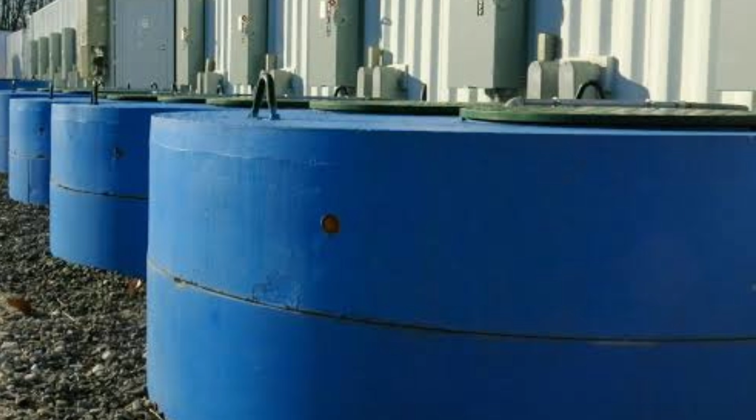Every gain that made these wheels worth building, more mass at the rim, more diameter, more speed, was also, by the same physical law, a gain in exactly what made them dangerous when something inside them finally gave way. That contradiction sat quietly inside every mill running one of these systems, present on the calm mornings and the ordinary shifts, just as much as it was present on October 15, 1891, waiting for the specific, undetectable failure that would let it out.

The wheels that still spin today, sealed inside composite housings, storing power for a hospital's backup system or a stretch of electrical grid, are the same technology that spun in Manchester in 1891, still carrying the same lesson Amoskeag paid for in iron, timber, and 3 lives, that a slow and steady turning wheel can be quietly holding far more force than it looks like it could ever need to let go.